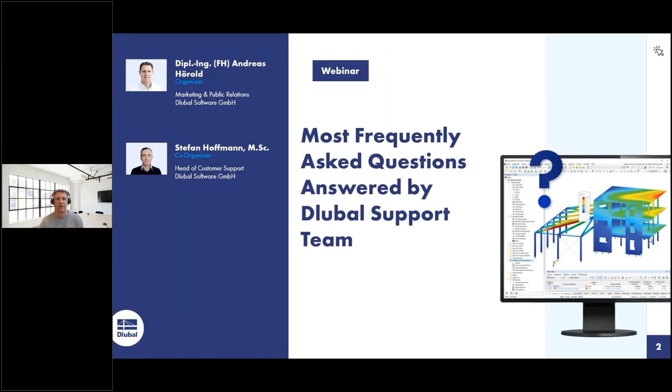I will be the moderator today, and I will also be a presenter. I present the first part of the webinar. Then follows my colleague, Stefan Hoffmann. Stefan Hoffmann is the head of our customer support. He selected the questions and prepared them. And now we will answer the questions.

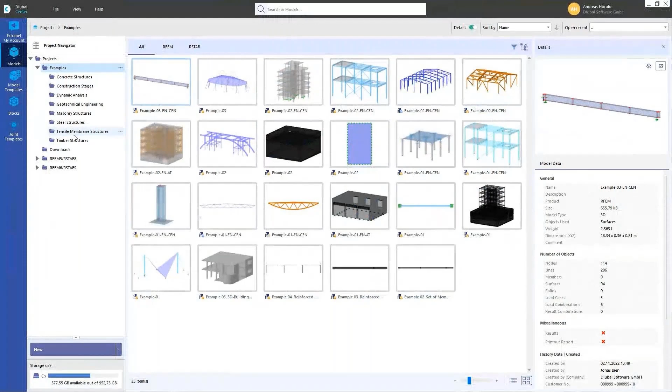info@dlubal.com. Okay, then I open RFEM, and the first question is: I add new objects to the design. Do all results have to be recalculated? The answer is no. It's not necessary to recalculate all. How to do that? I will show that on this simple example. You can find it in the Dlubal Center under examples, then steel structures. I prepared that. I selected also the steel design.

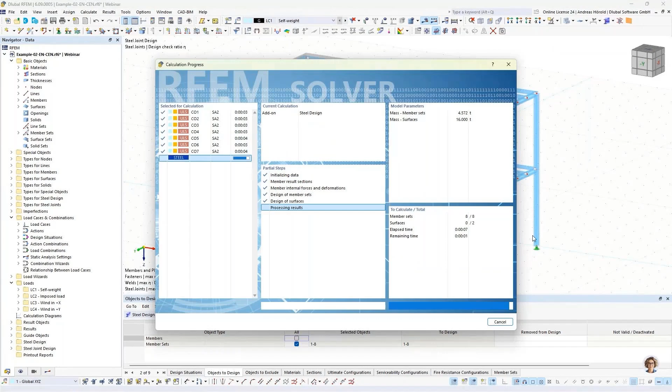Okay. So let's do a steel design. And I select only the member sets. The member sets are all columns. Let's calculate all. I have to mention that I don't edit imperfections. I don't edit buckling lengths and so on. That's why we don't do any stability design here. It's only an example. So I switch to the wireframe model.

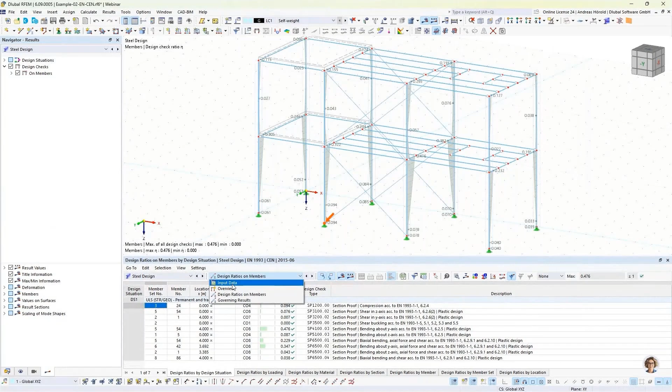And you can see all the results for the member sets. So, when we want to design also the members, I select the members, then all results are deleted. So now I show you the other way. I calculate the member sets again.

And if you don't want to delete the existing results, go to the navigator data, left at the bottom, and then right click on steel design and press settings. The other way is to go to the table steel design, input data, and then you can press that button. Then you can deselect the option "delete all add-on results by changing input data". And if you uncheck that, the results aren't deleted.

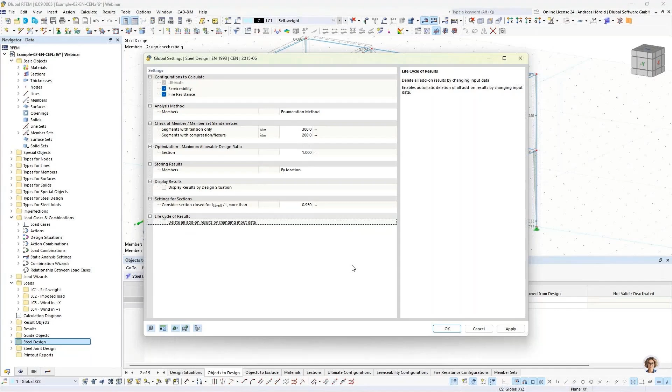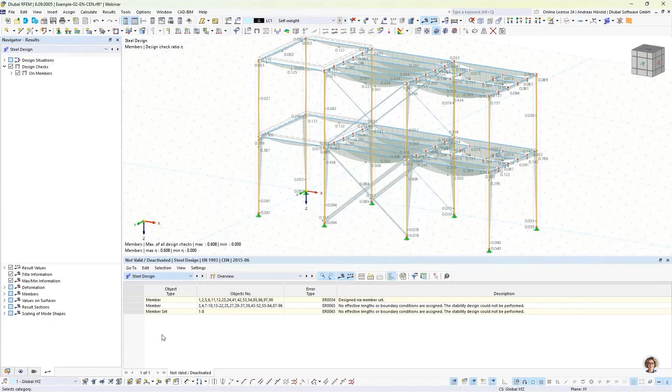So now we select also the members. The results aren't deleted, and I can recalculate all. So now we have results for all. It shouldn't be necessary for that simple calculation, but if you have, for example, more complex models or more load combinations and so on, then you can do that, or if you have activated the add-on steel joint design.

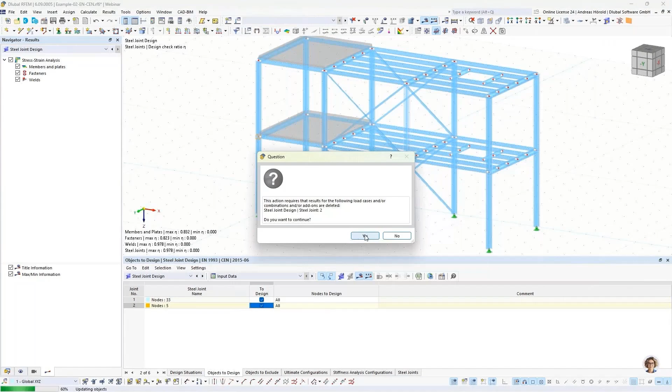In this example, only one of two nodes is designed. Yeah, only this node. I can show that. So this connection or the joint is already calculated, but not this one. And if I deselect that also, then I can press that button for designing node 5, and the results aren't deleted. It's only an error, not calculated yet, but the results of node 33 aren't deleted.

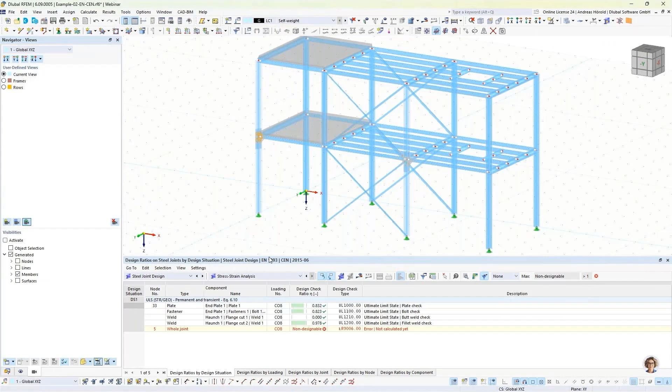Okay, then we turn to the next question. I want to edit a multi-print afterwards. How do I do that? I prepared this example. At first, I don't show the results. As I said, I prepared user-defined views for the frames and rows. And I want to print the internal forces, for example, for the rows or the frames.

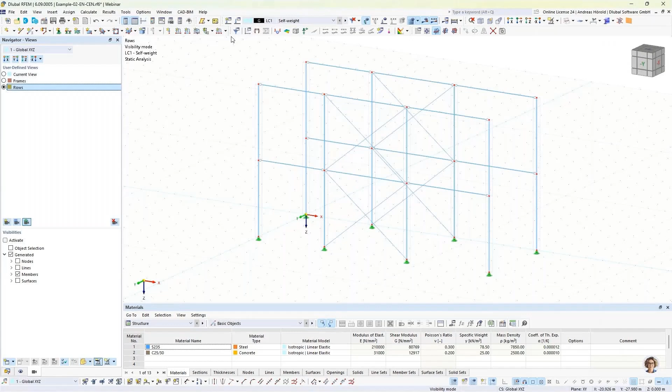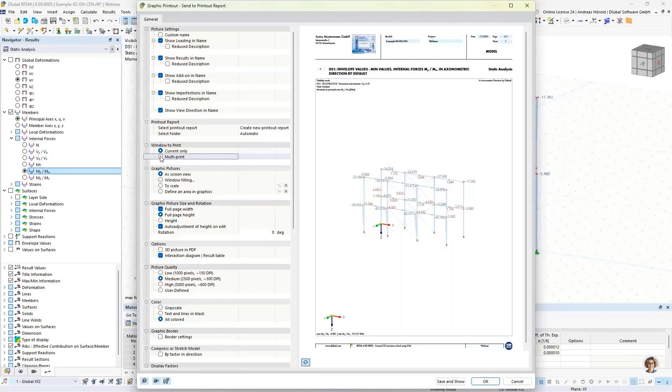Let me show that. For example, we show the member internal forces for N or My. And we would like to do a multi-print. So let's do that. Print graphics to printout report. Then I select multi-print and window filling.

So then we have to select what we want in the multi-print. No views, no loads, but results. For the frames and the rows, the user-defined views, then members, internal forces, for example, N, Vz, and My. 9 graphics, not the current view. 6 graphics. You can see that in the print preview.

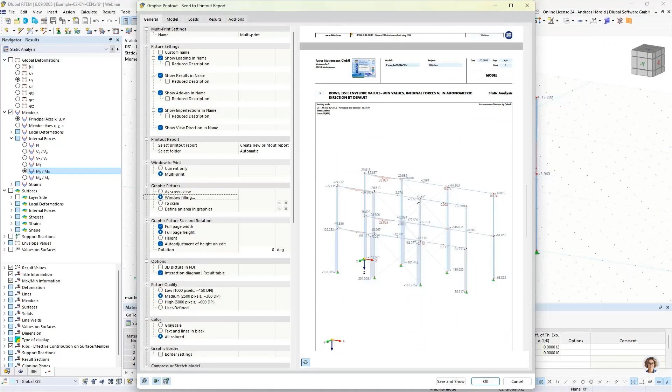So those are frames and the rows. Okay, I press save and show what we printed in the printout report. I don't print the steel design results and the steel joint design results. Okay.

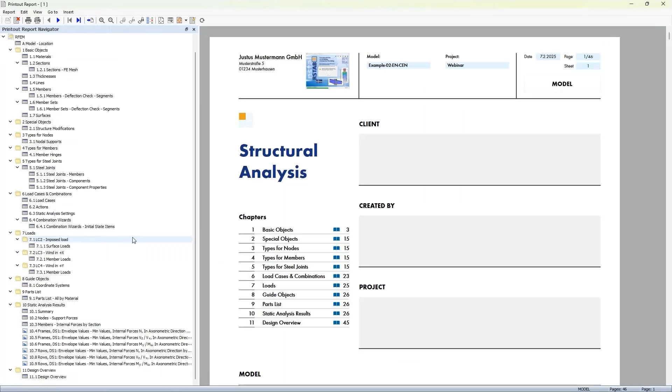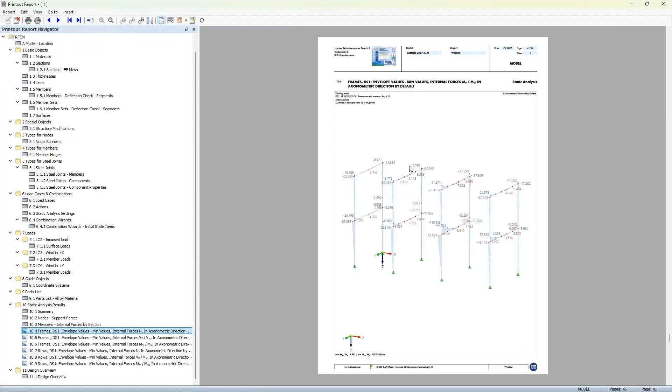So now we can see the different graphics. I can change the view, fit page. So those are the 6 graphics, and we want to edit these multi-print. So how to do that? That button, edit multi-print. I select it.

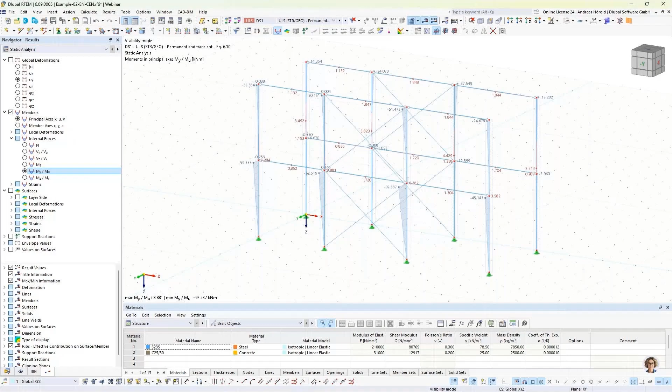Okay. So now we can change the settings. For example, results, we want to add the other internal forces. So now we have got 12 images. And we can turn to image actions.

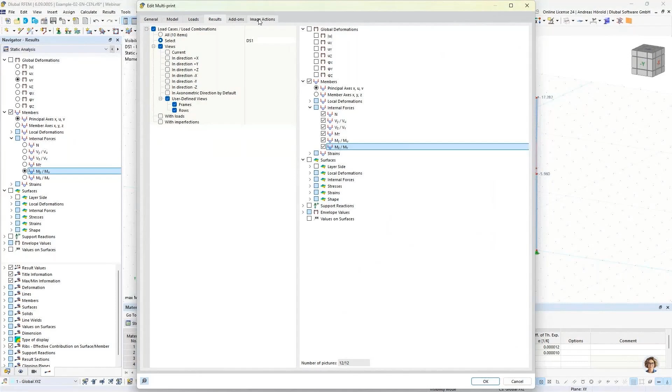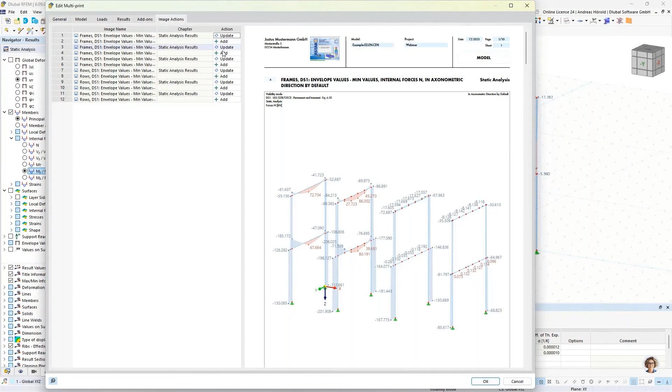And we can increase the window. We can say update or no action, add for the new graphics, or what you want. You can also change the graphic, for example, the color grayscale, then all images should be in gray. Update add, we leave that. Press OK.

So, yeah, the graphics are updated now, all in gray, and we have got all the 12 graphics. Okay, that should be all to that question.

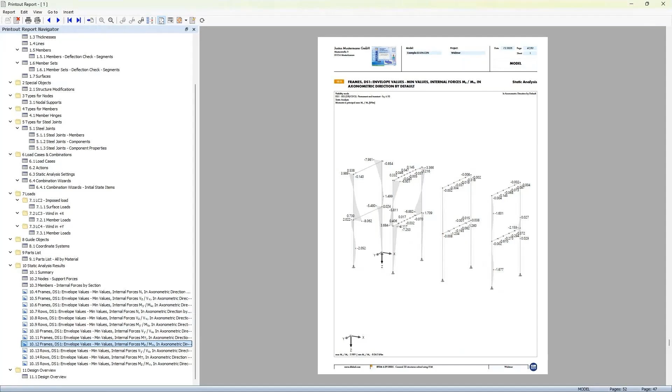The next question is, why do I get a different section moduli in RSECTION than in SHAPE-THIN? Let's turn back to the PowerPoint. The reason for that is the determination of the section moduli. That's different in SHAPE-THIN and in RSECTION. For example, in SHAPE-THIN and SHAPE-MASSIVE, the section moduli is determined by that simple formula. The section modulus is equal to the area moment of inertia divided by the edge distances.

And in RSECTION, there's a more complex or more detailed formula. It's more exact, and it's an improvement in RSECTION. And you will get different results. And what is important: in SHAPE-THIN, with the section moduli calculated in this way, it's not possible to directly calculate the maximum and minimum normal stress from the bending moments for asymmetric cross sections. For symmetric cross sections, you will get the same results in both.

And in RSECTION, the section moduli are determined in such a way that they allow for the direct calculation of the extreme normal stresses from the bending moments. And that's the difference. That's a short overview. You can find more information in that FAQ.

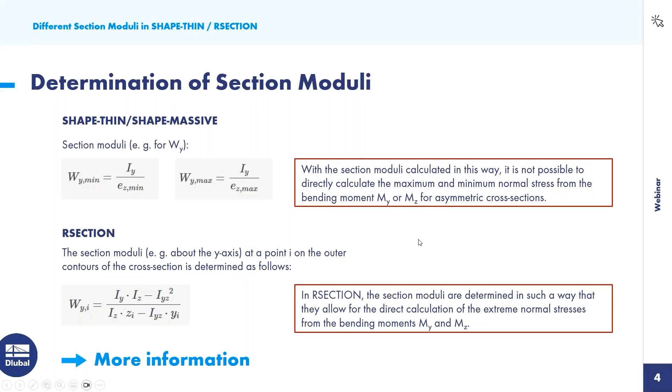Okay, let's turn to RSECTION and SHAPE-THIN. There's an L profile, and let's check the results. We start with the moments of inertia. That's the same. 515.9, and Iz is 94.46 for both. But the section moduli is different.

So, for example, Wy max 75 and, where is it? Here, 37.18. The section moduli are different, and the reason is as I described it in the PowerPoint.

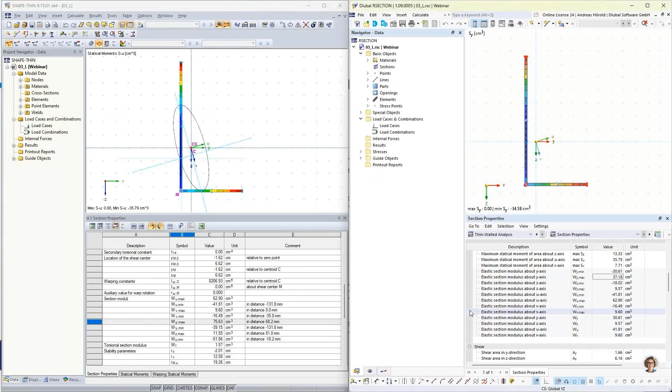So the next question is, can the longitudinal reinforcement of members be determined automatically? So I've created a model for you. This is a reinforced concrete building with members building a frame, having 3 frames in a row and 2 stories and load transfer surfaces, which will hand over the imposed load and the snow loads and the wind loads on our building. So we already have static analysis results.

And what we now want to show is how you can define reinforcements and let them be calculated automatically for you. So we show it in two member representatives. Number 2 are the outside members, and representative number 3 are the inside members. And if you double click on the member representative, you can assign longitudinal reinforcement for all the members behind.

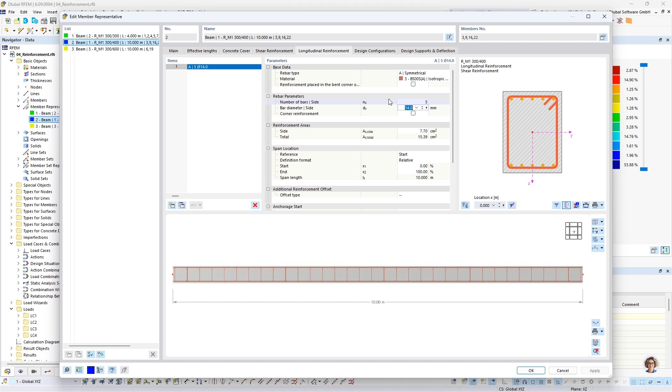So usually you can define the number of bars and the diameter, but the program can also automatically determine this for you. Not both simultaneously, but either the number of bars or the diameters. For the representative number 2, we want to automatically design the diameter. So we want to put inside 5 bars in the range of 10 up to 20 millimeters of size. Whenever it reaches the maximum, it stops, of course. So you should see in the results that then the design is not fulfilled.

So you can later on adjust these boundaries in order to let the program fully determine the amount of bars. So you see what you can enter in here. And for the representative number 3, we want to adjust the numbers. So we hit auto, and then we can also determine, with a diameter of 20 millimeters in our example, a maximum amount. I know that 4 are not sufficient, so we will try to put in 4 and see what the program will offer us.

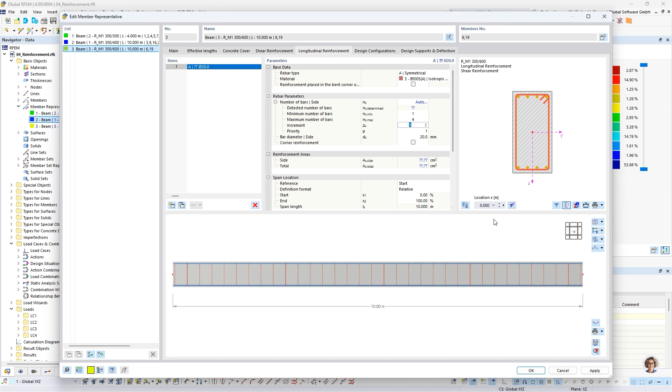We go into the concrete design, where we now only want to get results of both representatives. So now we hit calculate. Due to the fact that we already have static analysis results, it quickly jumps into the concrete design, now doing the workflow for you. So it's calculating the amount and the diameters depending on what ranges we input.

And once we receive results, we can see that one check is not fulfilled. So this may be an information that it's not sufficient reinforcement put inside. So we can quickly determine, for example, the bottom reinforcement for our representatives is like 17 in the middle. And what the program provided us, if you only check for bottom, is 12.57 in the middle.

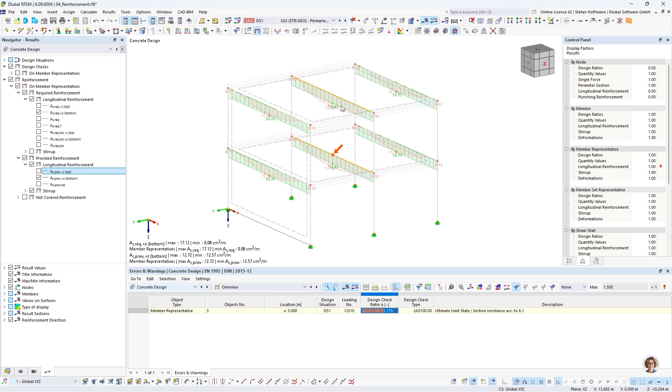So you may be wondering, of course, why it's not enough. You can also check this in the not covered reinforcement if you want to see the gap. So we can now see that there is only a lack in here. And if you remember, going into the representative number 3, I told that we want to achieve this result, that we put maximum 4 diameter 20 inside, which will give us 12.57. So this is, of course, not enough.

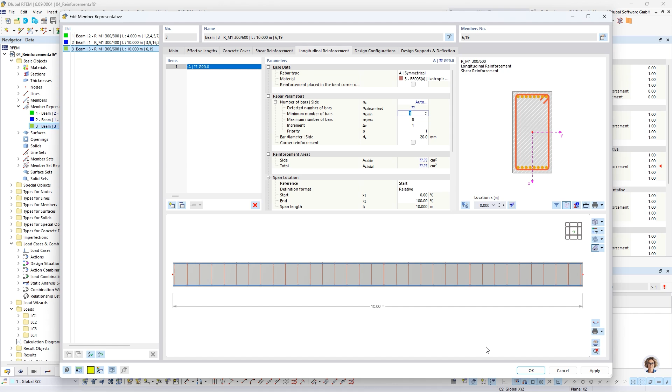So in order to let the program run in the full capacities, we now allow that we want to have maximum of 8 bars in this member representatives. So there is no boundary for the program that it has to stop. It can now determine and fulfill the design process.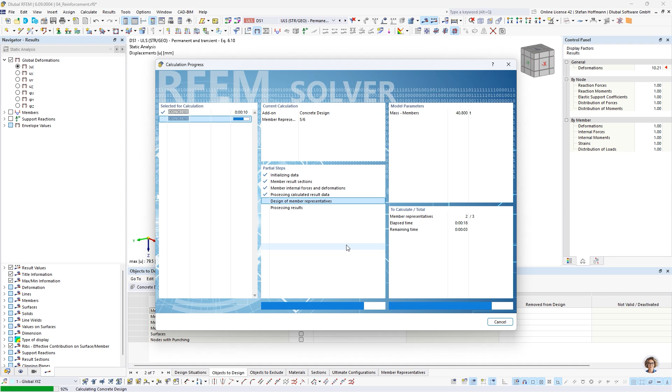So whenever you get then results, we see that in the table there is no limit anymore. There is, of course, a maximum, but this is only due to construction rules. And if you now compare once again, it does not change. We need 17.12, and we provide now 18.85 in this area. So this means that there is no not covered reinforcement for our model. And this shows how you can quickly automatically let the program determine the required reinforcement for your members.

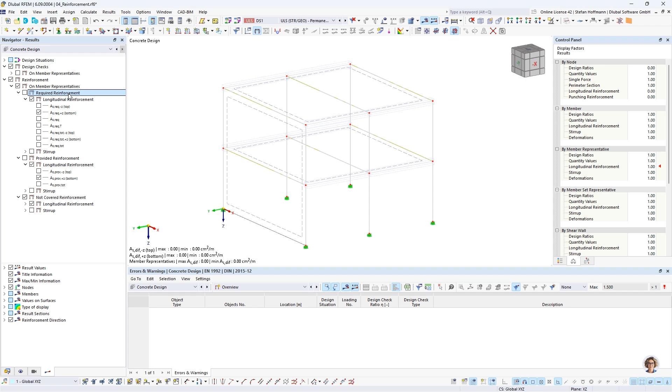We will go to the next model, our block foundation. So the question is, can I design a block foundation in RFEM 6? And yes, it's possible. So quickly about the model, we have just a single column which is fixed at the bottom with some loads on it. And in order to define a block foundation, you have to assign it in a nodal support. So you simply hit the check that it's a foundation, and then there's a next topic where you can choose what foundation you would like to choose.

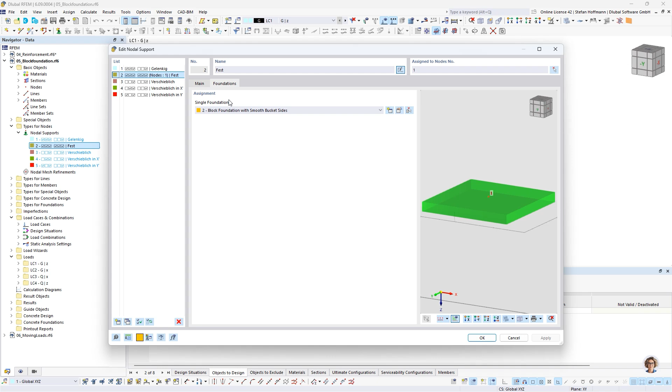So it's object oriented, as RFEM 6 offers you, to define one object of a block foundation for multiple columns. And you just simply need to assign this object then, and you do not need to type in multiple inputs just for multiple similar objects. So once you define this, it is also shown graphically, and if you double click on it, you directly jump into the single foundation. And you can see that there are several types, and we want to take care of the block foundation with smooth bucket sides.

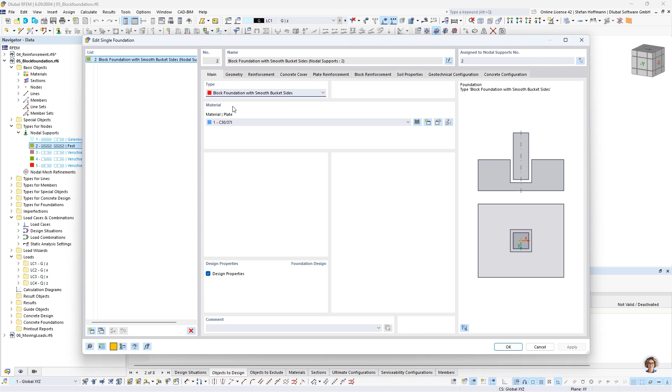So first you need to start with a material of the plate, and then you can step into the geometry, where you can define the geometry by checking the sketch, or you simply switch into the full view, where you can also use the view cube in order to rotate your model to see if it fits for your column and your purpose. And then you step in the next reinforcement definition, where you choose the material and the types. Then you switch into the cover, so you can define different durabilities for different places.

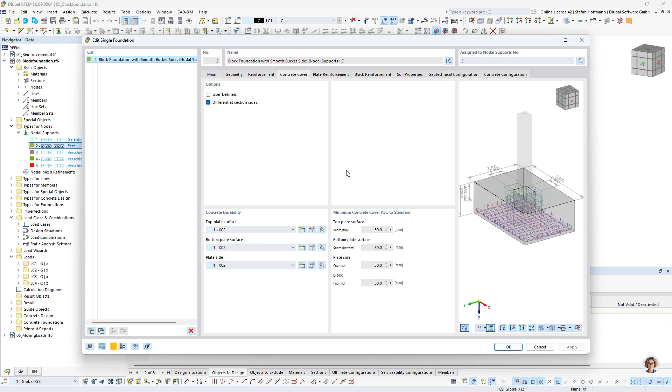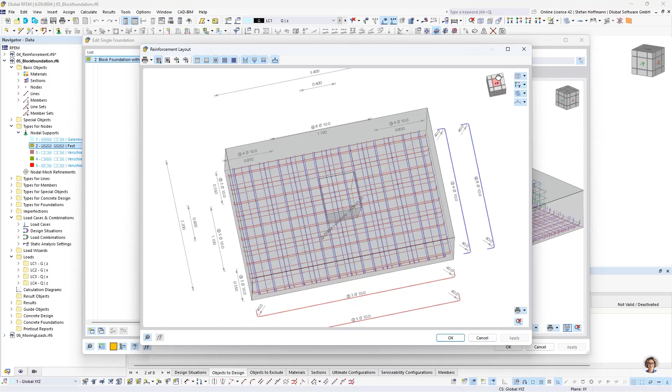And the next definition would be the plate reinforcement, so the bottom and top ones, where you can enter the data you would like. So you can also directly see the representation of the concrete reinforcement in the graphics. You can also jump with this shortcut into the reinforcement layout, where you also have the view cube, and you are able to switch on and off certain reinforcement types and also to print it into the protocol. The next one is the block reinforcement. So for the bucket sides, you can also define stirrups, which is most likely necessary if you have a lot of horizontal loads.

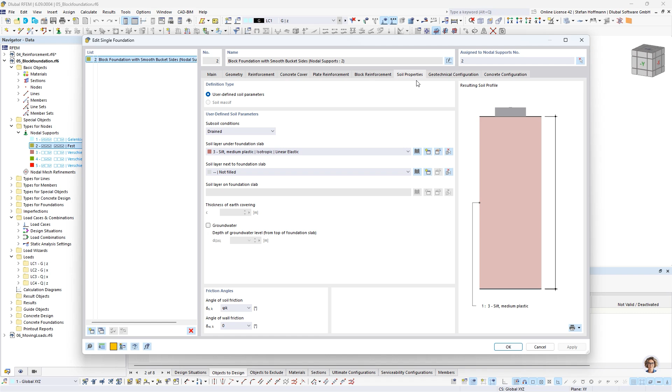The next one would be soil properties. So we also would like to do a geotechnical analysis in our model. So you can define user-defined soil parameters, or with the geotechnical add-on also a soil massif, in order to gain all the soil properties we need. The last two steps would be to check or assign geotechnical design configurations, where you can choose what you would like to inspect. So either it's necessary to do all, or you can just choose to do some designs only. And last but not least, of course, the concrete configuration, where you are able to adjust the current set parameters.

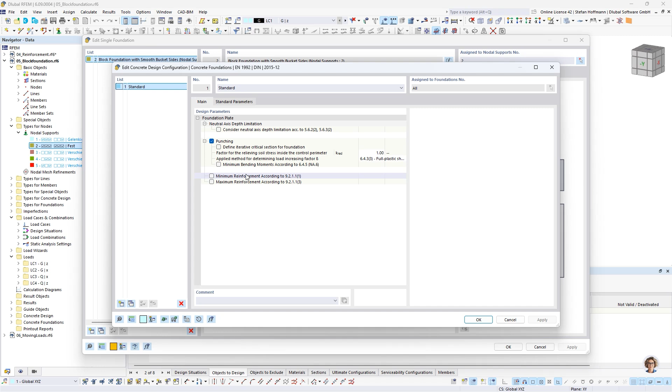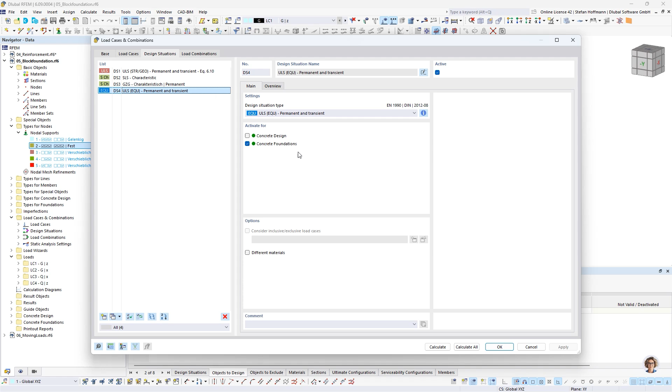So we defined all the properties. We just step quickly once again into the loads. So we defined multiple design situations: the normal ultimate limit design with structural and geo collapse, the other SLS situations, and also a ULS equilibrium permanent and transient design situation, which is what we will only take care about in our concrete foundations.

So jumping into the concrete foundations, you see that we have assigned the design situation types, and if we hit calculate, it will run first of all the static analysis, because we do not have results yet in this file. It does not take long. You can see 6 cores are used on my computer, 3 seconds. And then we will directly jump into the results.

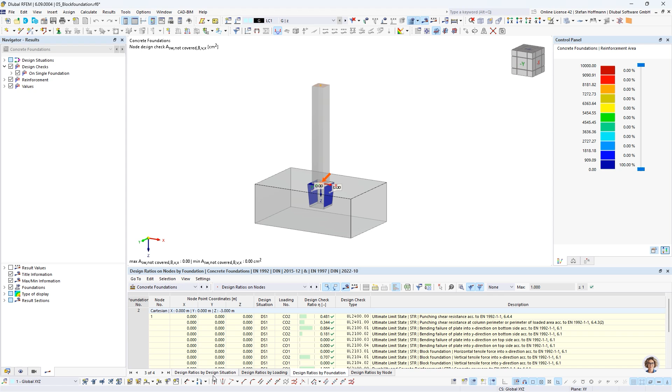So you have, as you are maybe used to, also table results, where you can switch between representation of different information. And you can also use, of course, the navigator in order to check for all the required or provided reinforcement, which is split as shown in the first part, also for the plate, bottom and top, and also for the block reinforcement, which might be required in order to fulfill the force distribution into the foundation.

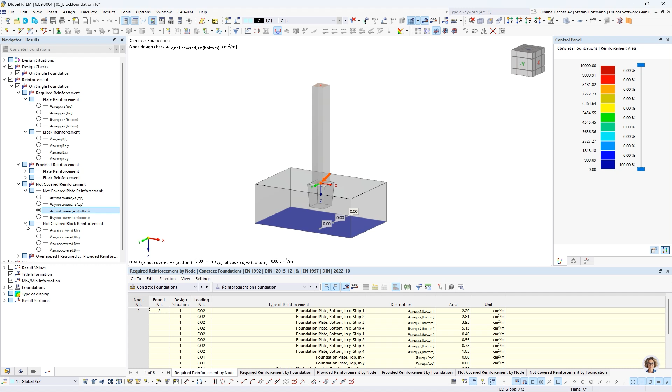And of course, you can once again also see the not covered reinforcement by checking the values. So as you can see, we are lacking some reinforcement in the bucket sides.

So we are coming to my last example. And the question is, how can I create moving loads in RFEM 6? So in this example, I use the model from our knowledge base article 1908. So we have a load which we would like to define, 2 single loads, 1.5 meter spacing, vertically and horizontally in both directions. And we have then an axle load of 240 kilonewton per square meter with a size which is given in here. So it should go across the bridge.

In order to have the loadings defined, we first of all need to have a line, which then needs to be a line set. So the line set will be used in order to define the load direction. And then it's no extra add-on which you need. It's already included in the main program. So it's a load wizard where you define a new load wizard with the moving loads.

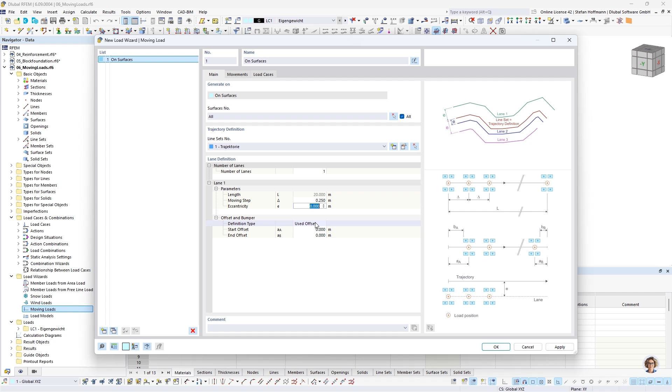You first of all go from top to bottom, left to right, and you have to define which surfaces you would like to use. In our example, we can hit all because only our street is used with surfaces. And since we only have one line set, it's already assigned over here. And we want to have the moving step a 1/4 meter. And the rest we can use as it is given, only one lane.

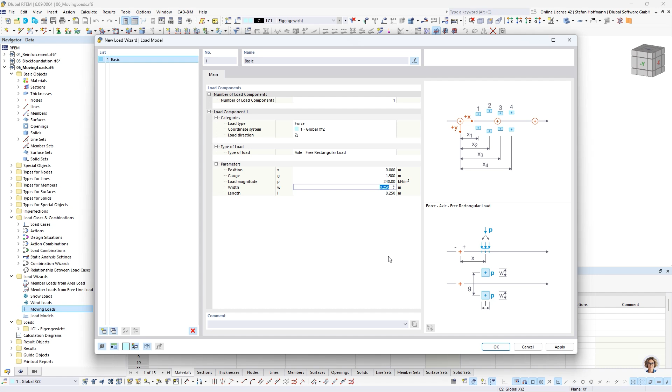And the next thing would be that we have to assign our lane definition with our load model. So you can go in over here, click there, since we did not yet define a load model. And we want to use one load component with a force, load direction ZL. We want to use the axle free rectangular load. And we will start at 0, have a gauge of 1.5, 240 as total, and then the width and the length, 1/4 meter. And if we hit OK, the lane and the load model are together, and we only need to hit OK.

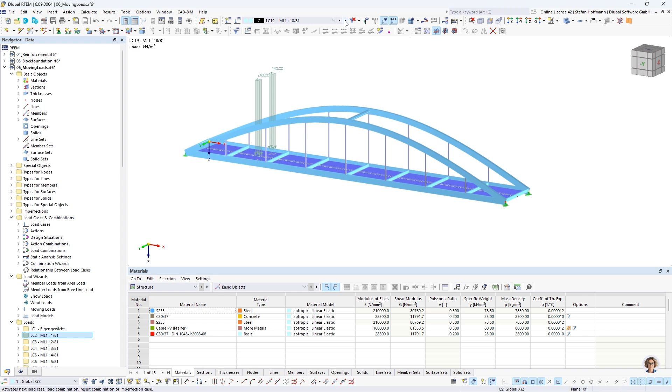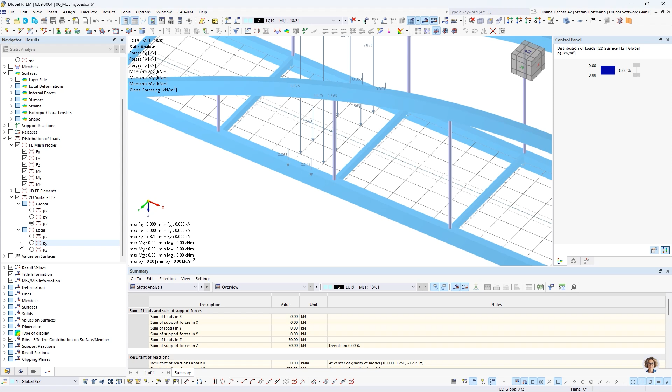So you can see that loads will be created, 81 load steps. And you can then, of course, see how the load is moving over your bridge by checking these steps. You can also run a calculation if you would like to do so for one certain load case, or you use it in a result combination so that you get an overview of your results. And also a good step you could use is the distribution of loads, where you can check how the loads will be transferred, most likely as pZ values, or sometimes also as split nodal loads, depending on how you use the definition.